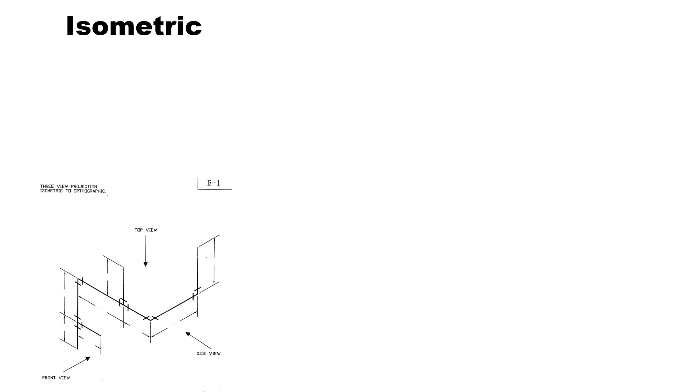Today we're going to talk about isometric views. We've gone over orthographic views, but isometric are a little bit different. Isometric projection is a method for visually representing three-dimensional objects in 2 dimensions in technical and engineering drawings.

They look 3-dimensional. If we look at the B1 drawing, which we've touched on a little bit, it looks 3-dimensional. You can see the entire shape, but it's 2 dimensions. The way they get that 3-dimensional effect is by drawing at 30-degree angles, which is the 30-60 triangle that you have, used to draw these.

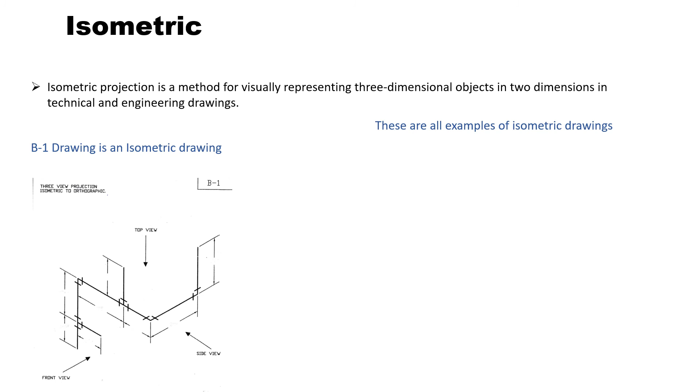So the B1 drawing is an isometric drawing, and these are some examples of other types of isometric drawings. A cube, you see it's a 30-degree angle at the bottom of the cube. Here's another isometric drawing and another one also. So these are just examples of what we're going to be looking at and delving into a little bit here, touching the outer surface of it.

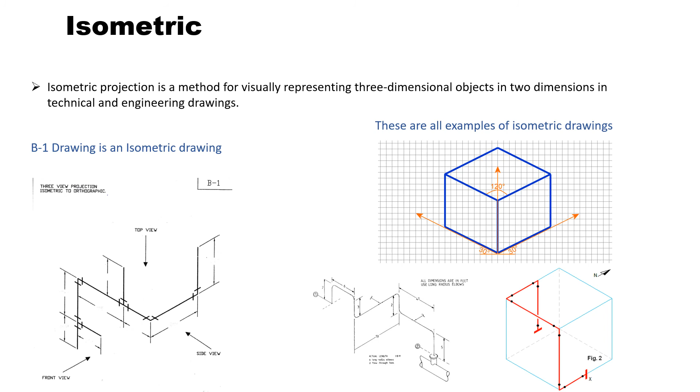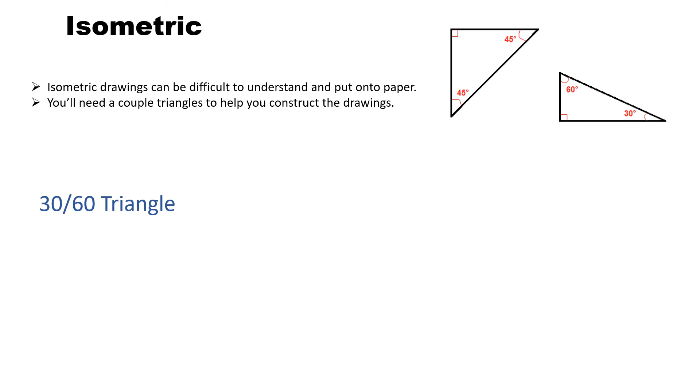Isometric drawings can be difficult to understand and put onto paper. You'll need a couple of triangles to help you construct the drawings. The first is a 30-60, which you'll use more often than the 45. You can see on this we have 30 degrees here, and then you have 60 degrees right here, and then a 90 right angle at the bottom.

There's also the 45-degree triangle, which has 45-degree edges on it and a right angle down here at the bottom, 90 degrees. Same with this, 90 degrees. So it's this 30-degree angle that we're going to use quite a bit for isometric drawings.

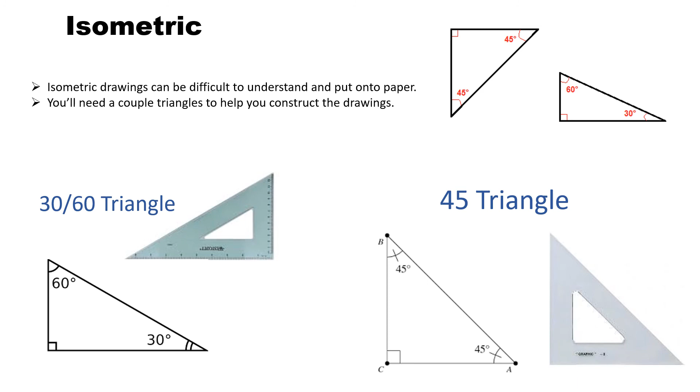Some things to keep in mind when drawing isometric paper drawings: if you don't have isometric paper, you need to use a base construction line, a horizontal line drawn across a blank paper. All horizontal lines of the actual drawing are done at 30 degrees, but your construction line is a straight line across the bottom or center of the page. You can make as many as you want, but generally they're erased at the end of the drawing. All vertical lines, whether it's a plumbing vent or a plumbing drain line, are all straight up and down, vertical.

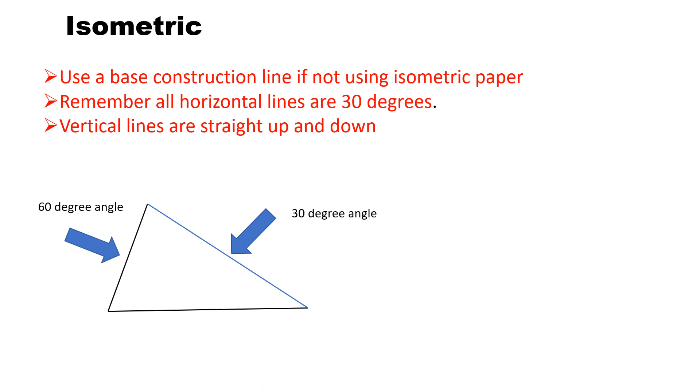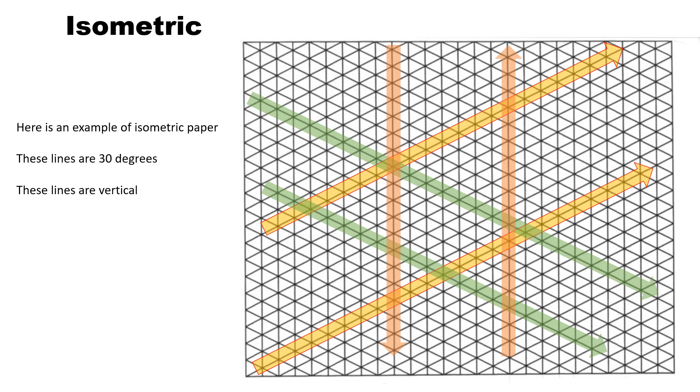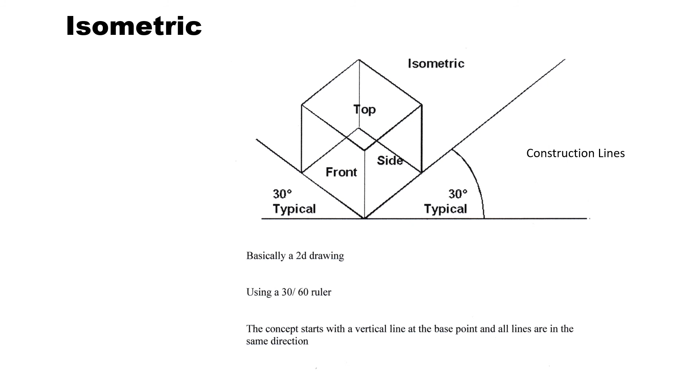So like I said, the construction line, the first one you make is going to be your horizontal line. There's no length to it, it doesn't matter. You just make a line as even as you can across the page, because you're going to put the triangle on this line all the time, and it's going to make sure that your drawing is perfect, everything lines up. So we have here two 30-degree lines. That's typical for them, and that's the way you start your drawing.

Now the cube is in the center here, so the drawing would be done. Once you've established this, you would erase your construction lines from here along the bottom, and from here to here, and from here to here, leaving you with just the cube.

These are 2-dimensional drawings, again using the 30-60 triangle. The concept itself starts with a vertical line at the base point. So here's your vertical lines at the base point. Keep in mind, all lines when doing isometric go in the same direction, so they're parallel. This line is parallel with this line, and this line, and this line. So you notice in isometric, the lines don't cross, because then it wouldn't be a two-dimensional drawing anymore.

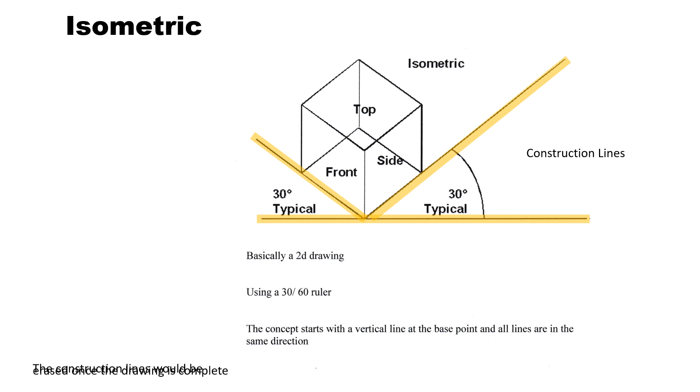So here's a couple little basic rules, and some of this gets a little further into it than what we're going to actually touch on.

All vertical lines are drawn up, for instance, for a plumbing vent. All vertical lines are drawn vertically down for a drain, such as this here.

You always try to keep the trap arm going in the same direction of flow. So if you were to draw a trap, you go 45 down and then down into the drain for vertical. You wouldn't take this line and go this way, then come back up and down. So the trap is going to go in the flow direction.

All horizontal pipes are drawn at a 30 degree angle. There's the 30-degree angle.

A 60-degree angle is shown to show a wye, and a 45 off of a 30. So this is trying to show a wye fitting coming off of your 30-degree angle here.

We're not going to get into this as deep right now, but you must show a real wye if you have an isometric horizontal pipe and the wye connection is on its side. It's drawn at 0 degrees if the branch is from the right to the left.

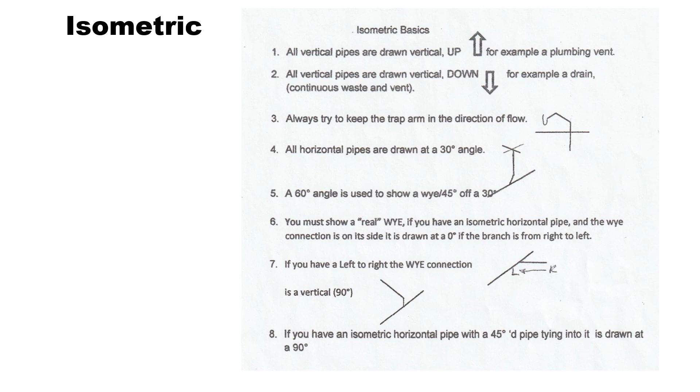So here's a simple isometric drawing. It shows a bathtub drain or a shower drain—we don't know, but it's in the ground, so I'll assume this is a bathtub. And here we have a basin sink, two fixtures drawn in a simple isometric.

This would be your construction line. You put your triangle on it and simply draw the 30-degree line. Everything vertical—here would be the drain, and here would be the vent—is drawn vertical, 90 degrees off of that construction line, straight up.

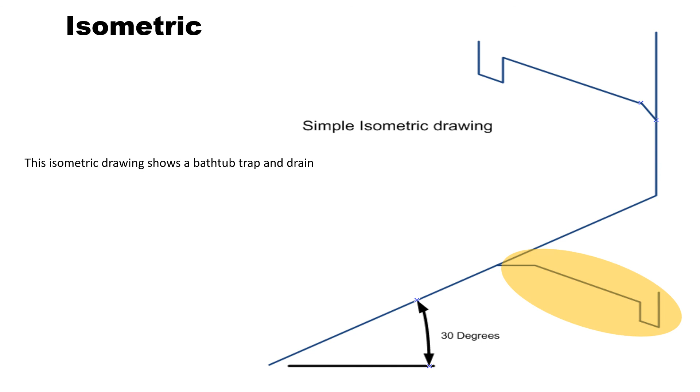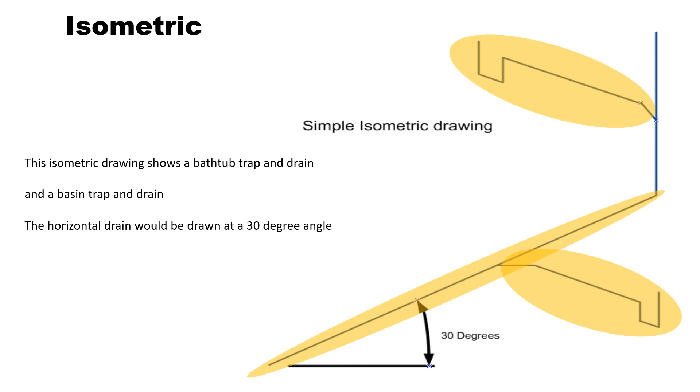So there's your bathtub and this drain line, and a basin trap in this drain line. The horizontal here will be drawn at a 30-degree angle, which is the main drain or horizontal branch, depending on what this is all tied into.

Isometric drawings use a compass to navigate around the drawing. If you're not familiar, a compass always points north. So if we take a look at these little diagrams of a compass, north is always at the top, south is at the bottom, west to the left, east to the right.

One thing you can always keep in the back of your mind, if it helps: think north like the northern stars, straight ahead up above. W and E is like 'we,' and south for the southern hemisphere if you like. But the trick is north is always at the top, and then W and E—it's never E on the left and never W on the right. It's always W then E.

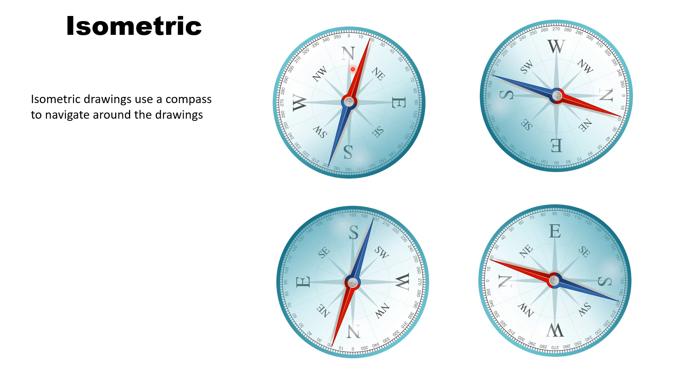And then you have northeast, southeast, southwest, and northwest. Really it's taking quarters and dividing them into eight.

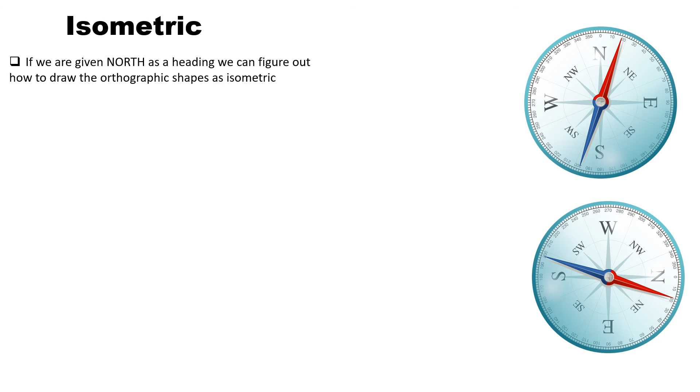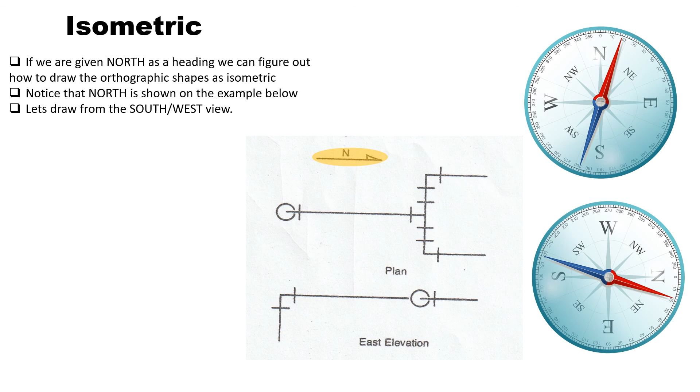So let's draw the southwest view. That's where you would be looking—well, not looking, you'd be standing and looking. So when I ask for a view, you have to picture yourself there looking in that direction. Some students get confused, thinking they need to be here looking toward the southwest, but that's not how it works. You are actually standing here, looking from the southwest.

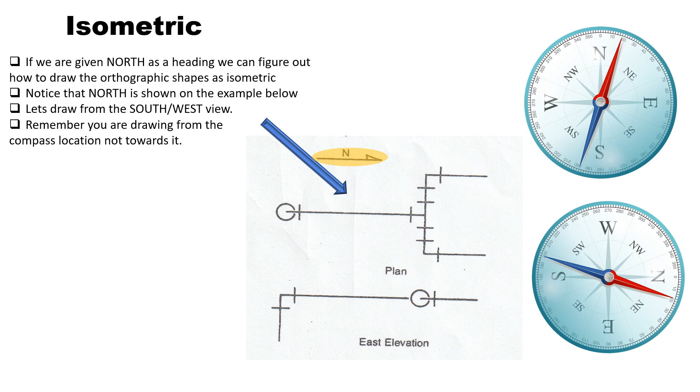So remember, you are drawing from the compass location, not towards it. If you're asked to draw southwest, you have to picture yourself in the southwest location and draw what you would see.

So if we move the compass over, now you can see that the blue arrow and the compass land on southwest, and you're actually drawing towards the northeast.

Okay, so again, you have to picture yourself in the southwest looking at the object. Now, we've talked about top view, side view, front view in orthographic. The plan view is the same as top view. The elevation is looking straight on at an object. In this example, it gives you the east elevation, which is basically the side view from the east.

The best way to explain elevation view is if you're riding in an elevator and the door opens and you step off and look directly straight in front of you, everything you see would be an elevation. Another way of thinking about it is like a Barbie doll house, maybe your sister had one, or hey, maybe you had one. It's all good. You open up the doll house and it would be full of rooms. That's the elevation view. You're looking dead on at everything in front of you.

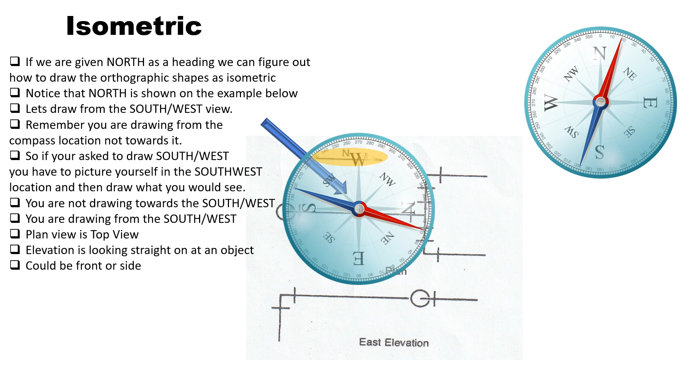So elevation can be considered a front or side view. Basically, for isometric, you're going to have two views: a plan view and an elevation view. And that should be enough to allow you to do the drawings.

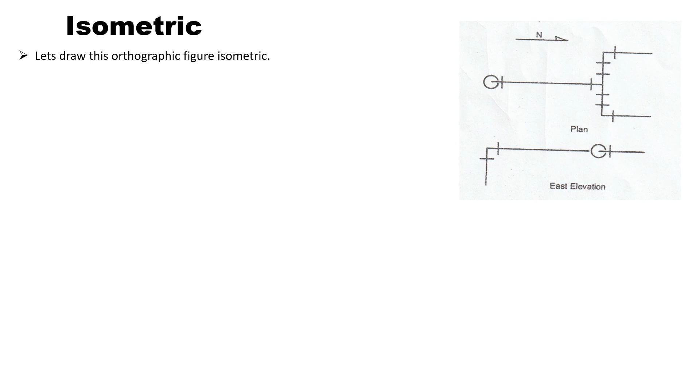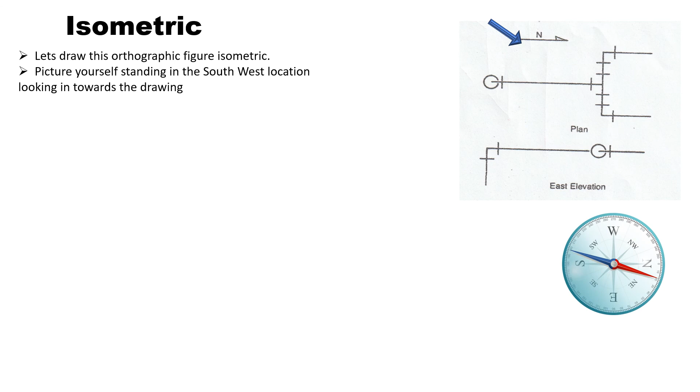So let's draw this orthographic figure in isometric. Picture yourself standing in the southwest location looking in towards the drawing. We're standing there looking in towards this drawing. Using both the plan, which is the top view, and the elevation or the side view, try and picture what you are looking at. You have to take a peek at this and remember your orthographic rules to figure out the actual shape itself.

So the point where you're standing is the lowest point of the 30 degree horizontal line you must draw. If you're standing here looking into this, this is the trunk of the drawing. The main part is going to be on the 30 degree angle. These will be on 30 degrees, and so will these, because they're parallel.

This point will be the low part of that 30 degree rise. So it starts here, it rises up, finishing here. Wherever you are is the lower end of the drawing, and you're always rising up.

If we look at this from the top view, the plan view, here we have a 90 going down. When you see that from the side view, the 90 is coming along here and it turns down. It's coming along here and there it is turning down. From the top view, we see we have a flat 90 here, then it goes to a flat T, and then two flat 90s.

Now, what we have to keep in mind with this is that you can't necessarily figure this out all on your own. You need to have the two views.

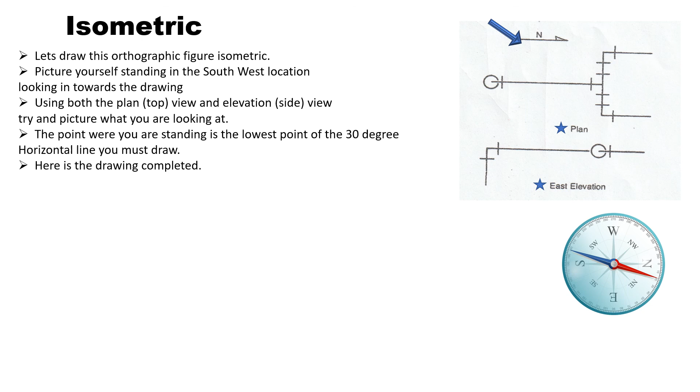So here's the actual drawing completed. If you want to take a moment, pause the video, and maybe try to sketch out something. Maybe you've got it, it'll give you an idea of whether you've got it, or you're in the ballpark. Okay, so here we go.

So if we put the compass over it, remember we are drawing from the southwest.

So we're down here now, because that's where we're looking from. You are in the southwest, down here, looking into this. So here's the line coming down, and the pipe drops down, right? Pipe comes across, pipe drops down. Pipe comes across, pipe drops down. There it is there.

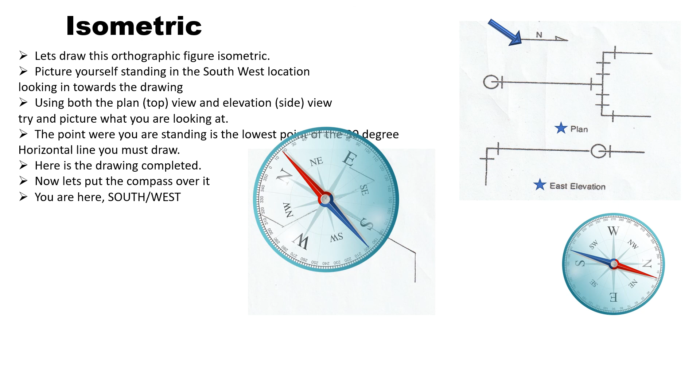Okay, that's your view. That's where you're looking from. And that is the final drawing. Because if you break this down, you have a pipe - let's just call it line. You have a line coming here, and you have a line coming across here. So from the top view, if you're up here looking down on it, you would see this coming across, which is this, right? Then you have this here line, which is this. And then you have these two back lines here. And that's them right there.

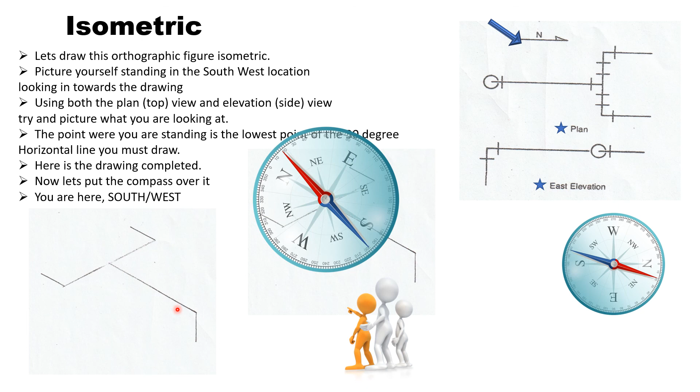Now you notice at this point in the game, there are no hubs on the isometric drawing. None of these, right? These slashes here, if you will. So there's none on the isometric for now. Some teachers are different - some teach it with it, some teach it without. For now, we're not going to be using any hubs. So I would consider this drawing to be completed, right? No hubs. It is just the way I would expect it to be done.

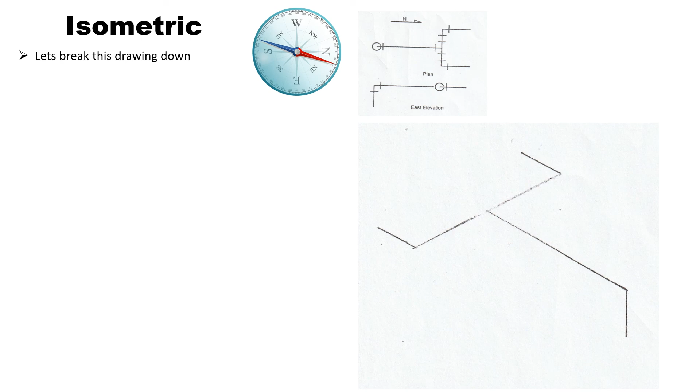So let's try to break down the drawing just a little bit more. I'll go over it one more time with you here. You are here, right? This is your view looking in this direction, right? Because we're going with the southwest view. If you look up here, here's the southwest, which puts you up here, looking inwards, right? So there you go. That's your view.

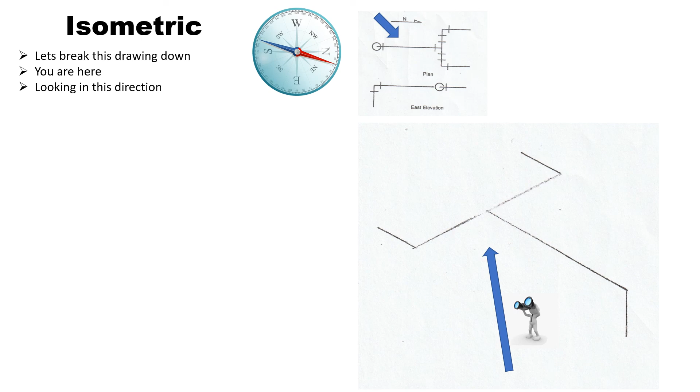So wherever you are located is the lowest point of the 30-degree horizontal line you must draw. This is your 30 degrees line. Down here you'll have your construction line, but this is your 30-degree line. And this is you down here. This point's really the closest to you. I know the little man is this close, but you could be way back here. It doesn't matter. This is the lowest point, and it rises on the 30-degree angle with your triangle.

So there's the lowest point. This is the top of the 30 degrees horizontal. All the lines are parallel. All these lines are 30 degrees. It's just a matter of flipping your triangle one way or the other.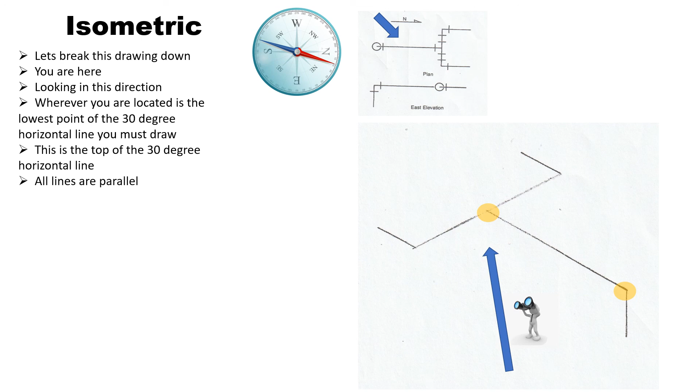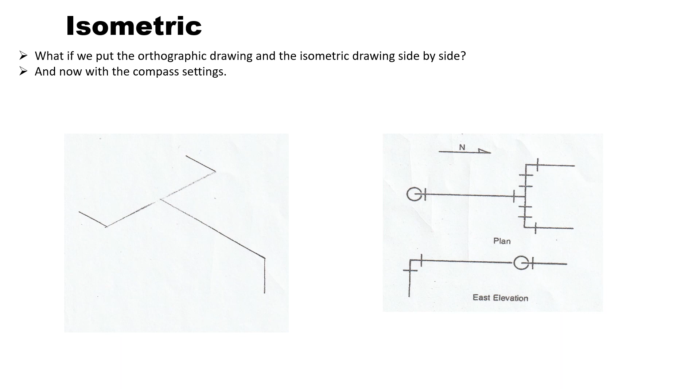So let's get our directions in here. We'll put the compass settings in, and maybe it will help you a little bit more. So here's north on the isometric, and here's north on the orthographic. And the reason I know this is north is because in all these, for the most part, you'll get some kind of a compass heading. This is pointing north in this direction, so here's north.

Then we have south. So where's south going to be on this one? Is it here? Is it here? Well, south is always below the N. So here's west. Remember we talked about WE, west and east. So we know that on the other side of the W is the east.

If you look at this drawing, and we're in the plan view, so we're looking down on top of it, like you're a bird flying through the clouds, looking down on something. The west side - if we're looking at this, we've got a pipe coming towards us and a pipe kind of going away. Here's our west view, and here's the pipe coming towards us, and it's kind of going away, or flat to the viewer, if you will.

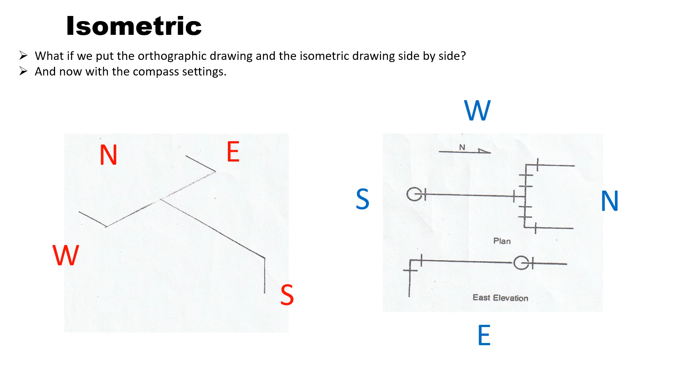So hopefully this helps you. It's a little tricky, but take your time with it. See some of the videos, and hopefully we'll be okay. And that's it. Thanks so much for watching.